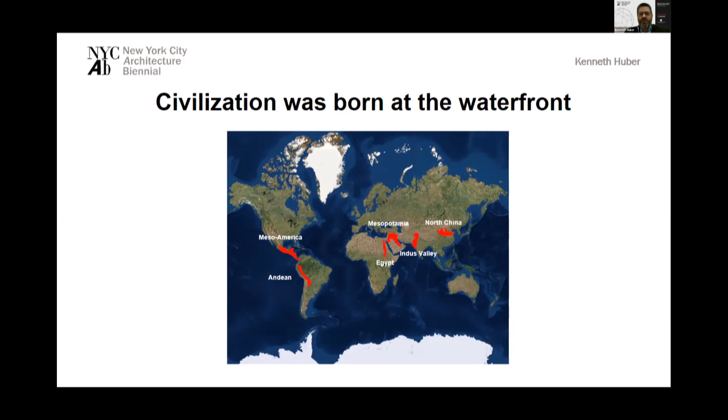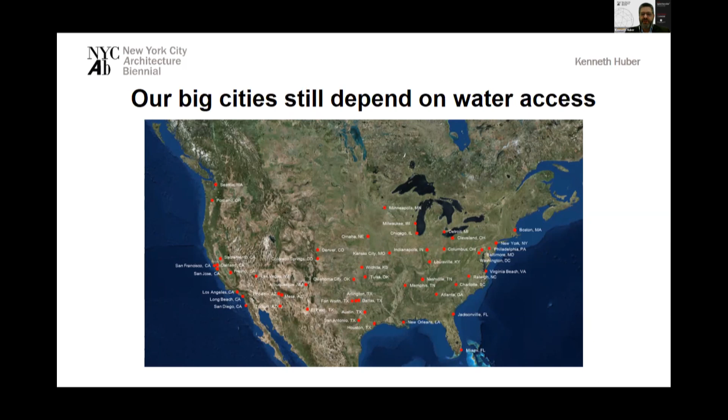Quite frankly, not much has changed, at least in the US. Our major cities are either on coastal bodies of water or inland bodies of water, whether that be lakes, streams, or rivers, because we still have that kind of dependency on the water for sustainability and success of that urban environment. I'm primarily focusing on urban waterfront redevelopment, but these same principles can apply beyond that.

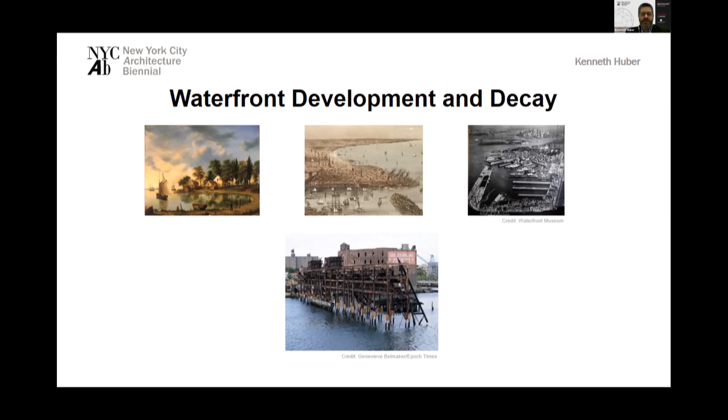But as shipping has moved away from the water, pun intended, into other forms of transportation, those properties have become dilapidated, decayed, contaminated from years of industrial use, cut off from the surrounding neighborhood, and really falling into the water, causing even more contamination. They've become an eyesore. Something needs to be done.

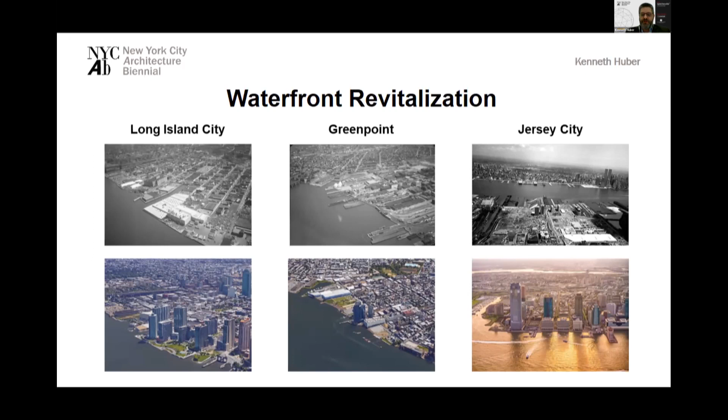What we found consistently, time and time again, with a few examples shown on screen, is that when we redevelop and revitalize a particular block at the water's edge, the neighborhoods around it begin to be revitalized as well. Investing in a small section of the waterfront can have a radical impact on the surrounding neighborhoods. I want to share with you a case history from Jersey City, specifically Paulus Hook.

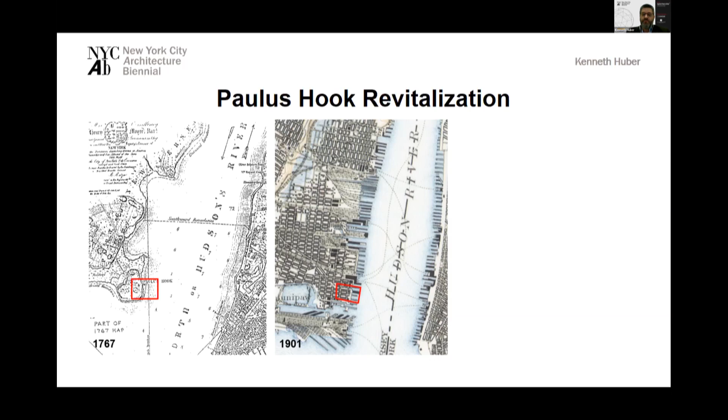Our particular site, again in the red box, was occupied at this time by the Colgate-Palmolive Company. They occupied 14 blocks in downtown Jersey City, and this was the center of their operations. From this point, their goods were sent around the entire world. You can also notice that they have 4 piers within their property, and you'll notice how that changes over time.

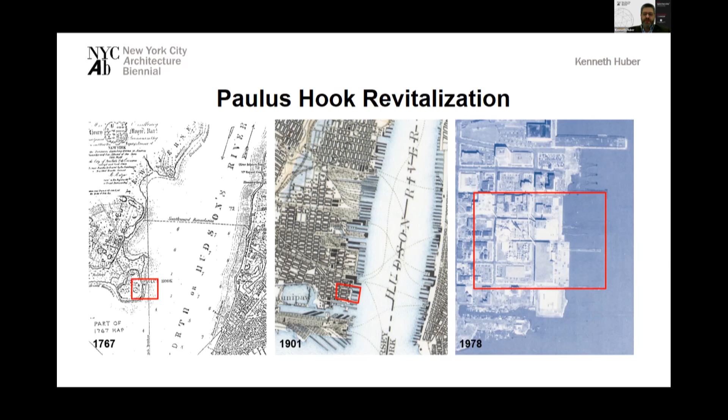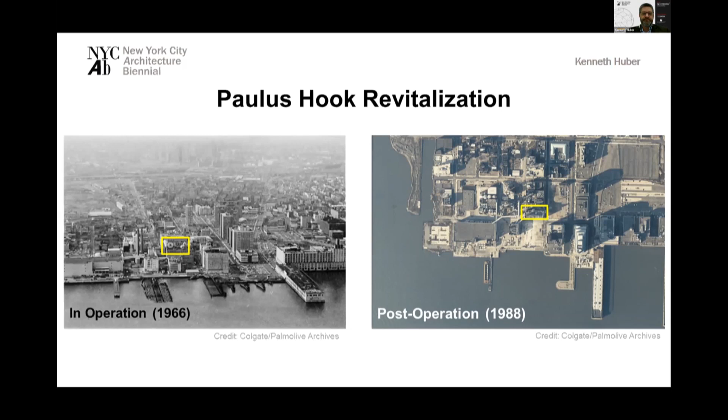So obviously something had to be done. This site's contaminated from years of industrial use, so that cleanup needed to take place. This bulkhead is not providing a reasonable cutoff to prevent cross-contamination of those contaminants. The site's also cut off from the surrounding neighborhood, literally by fences. The streets themselves are inaccessible to the public. And the infrastructure is so old and falling apart that it could not support future development.

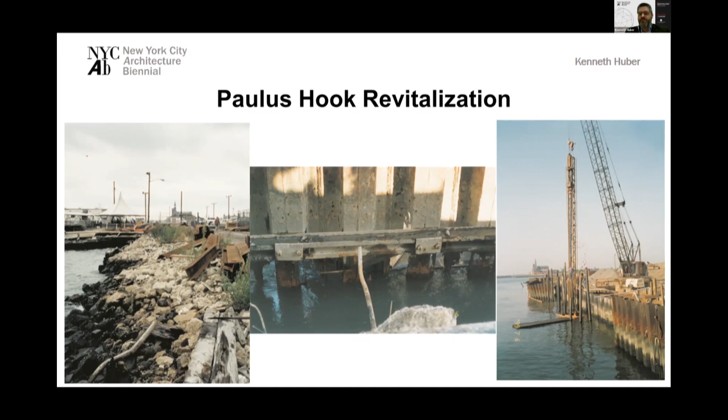So Colgate decided to invest in some infrastructure improvements to allow for future development to take place. I'm going to go through some of the key aspects of the improvements that they did.

First off, they replaced the existing bulkhead with a brand new bulkhead to protect the shoreline, prevent it from further eroding, and also allow excavation of contaminated hotspots upland of the bulkhead. You can see some of that excavation taking place there. That bulkhead also serves as an effective cutoff to prevent migration of contaminants into the body of water once it's finished.

Immediately behind the bulkhead, they installed a brand new 8x10 box culvert combined sewer outfall. This box culvert connected 3 combined sewer outfalls and redirected them to a screening chamber at the far south end of the site. Jersey City was working on the screening chamber, and Colgate worked with Jersey City to design this box culvert to connect to it.

So three combined sewer outfalls that dumped raw sewage during storm events were now taken out, redirected, and are run through a screening chamber before they discharge. That takes out a lot of the large particles and floatables that are in the water before anything gets discharged, and that's a significant improvement over what was there before. Now, mind you, we would love to see more done to improve combined sewer outfalls, but this was a huge step, cleaning up three combined sewer outfalls in one project.

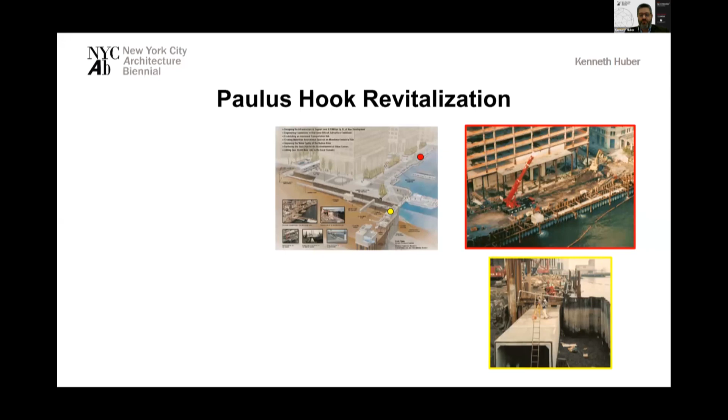Colgate also worked with NY Waterway to install a brand new ferry landing at the facility, and none existed before. It wasn't planned before, but when Colgate began to talk about the possibilities of future development, NY Waterway saw the potential and joined in the project, and we helped develop a ferry landing to go with this redevelopment project. That ferry landing is two blocks south of the Exchange Place PATH Station, so there's a subway nearby.

You can see a parking lot right behind the ferry landing, so there's parking where you can park and ride. Furthermore, just one block to the west of the shoreline is the New Jersey Transit light rail system. Again, no station was planned, but Colgate worked with New Jersey Transit to install a new station right at the site, and also worked with them to allow for infrastructure improvements, new utilities to be placed below the new light rail lines to support future development. So you've got an intermodal transportation hub within two blocks right here: park and ride, light rail, ferry system, and the PATH subway.

And they finished it off with a beautiful esplanade that's open to the public. On a nice day like today, you can go out there on lunch and really enjoy the views of Lower Manhattan. It's absolutely beautiful. And what amazes me is this was 4 blocks of shoreline, roughly 1,200 feet.

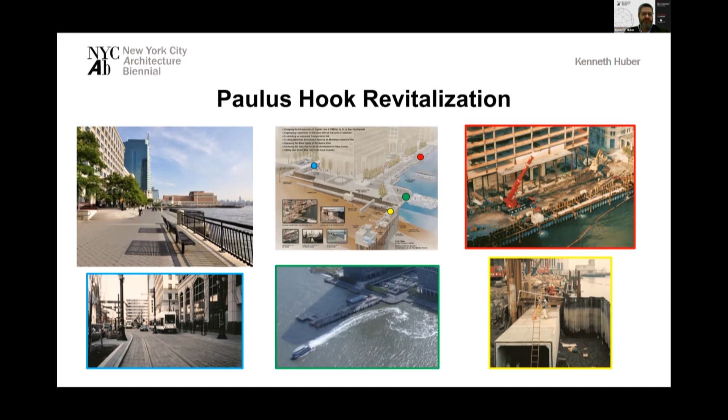But what's happened since is a complete revitalization of downtown Jersey City. Shorelines both to the south and the north have been improved for many blocks. And we've seen brand new development take place, not just on those 4 blocks adjacent to the waterfront, and not just all 14 blocks of Colgate-Palmolive, but throughout this neighborhood. It's had a huge impact on redefining Jersey City. And this is the sort of thing that makes waterfront improvements and sustainable waterfront development so exciting, because it can have such a radical impact on the neighborhoods along the waterfront.

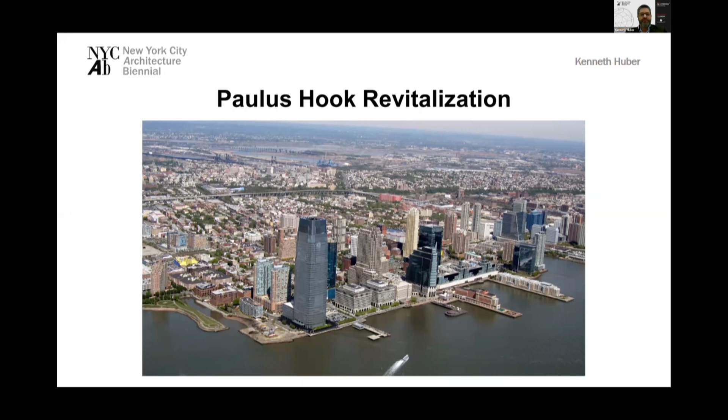And as designers, we need to respect that power, as we've seen in Ida up in New York City, as we saw in Superstorm Sandy back in 2012. Water has incredible destructive power, and as designers, we need to respect that and build that into our design plans. So let's take a look at what's so difficult about waterfront construction, waterfront design, waterfront development.

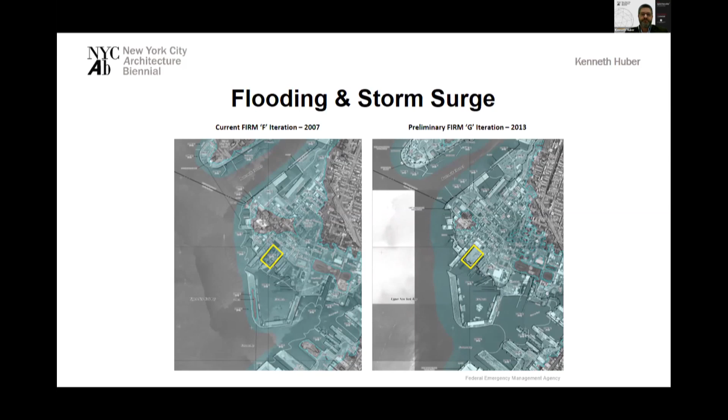This sets what's called our base flood elevation. So what level of inundation can we expect? Let's say from this map, it's roughly elevation 10. So that's our base flood. That's where water levels will rise during a storm. But again, that's just a snapshot.

And just as was talked about in the previous presentation, we need to consider things like climate change and sea level rise that results. Now, I want to be clear, sea level rise is not a new phenomenon. It's a known fact. It's been happening for hundreds of years and has been documented. The part that we are not so familiar with, what we are trying to predict, is the impact climate change can have on sea level rise.

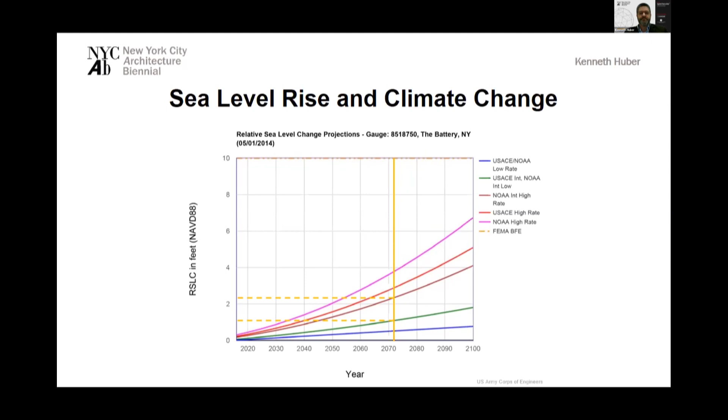So we have our base flood elevation from FEMA, but that's a snapshot in time, and our building needs to last for 50 years. So we need to see how much sea level rise we need to understand and design for. And then we need to put that all together.

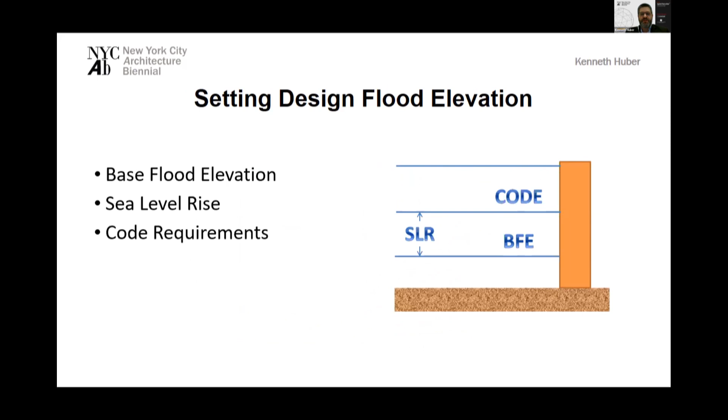So we start with our base flood elevation from the map. We add to it our sea level rise from the predictive models we just looked at. Then we add to that the code requirements for a particular freeboard. And those codes are changing, so you need to understand your local building code and apply the required freeboards. And that gives us what's called our design flood elevation.

Now, everything else that we talk about from this point forward is related to that design flood elevation. We can set that design flood elevation where we feel is appropriate based on that sea level rise. We can even provide a larger freeboard than code requires. And zoning code allows us to do that in most jurisdictions.

But we, as the design engineers, we as the design professionals, need to come to the table and make an assessment of where we think we want to design this particular project for. That's up to the design professional.

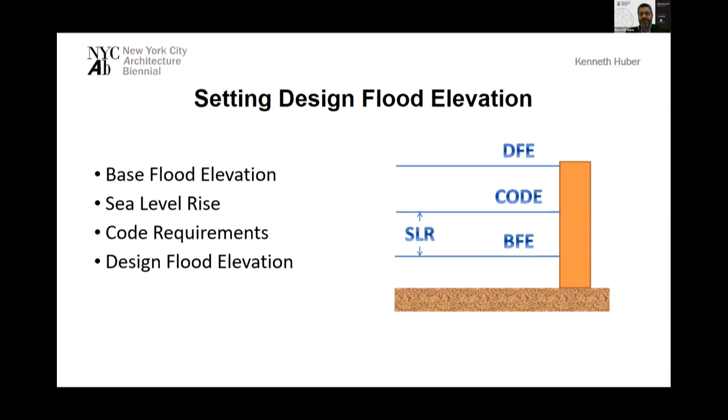So once we've set our design flood elevation, we have other things to consider. And this is where things continue to become difficult at the water's edge. The next thing to consider is loading.

So when water inundates a particular site, hydrostatic loads occur. Hydrostatic meaning it's water that's not moving, simply by being there. Loads are imposed on the side of the building because the water wants to push in. But loads are also applied underneath the slabs of the building.

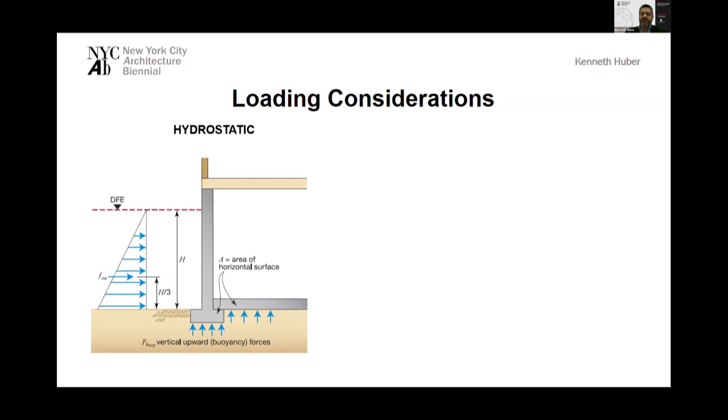So for example, if your building has a basement and that site gets flooded, that basement is well below grade. And the deeper you go in water, the more pressures push up on that slab. And we need to consider that because a slab, a basement slab, can fail under hydrostatic pressures. Even if nothing moves, even if the water stays still, that pressure can pop a slab and cause extensive damage inside.

We also need to consider that in flood, those waters are moving, and the movement of that water increases loads on a structure. It pushes against that structure, causes drag along the sides, and we even have crashing waves if the storm water is high enough.

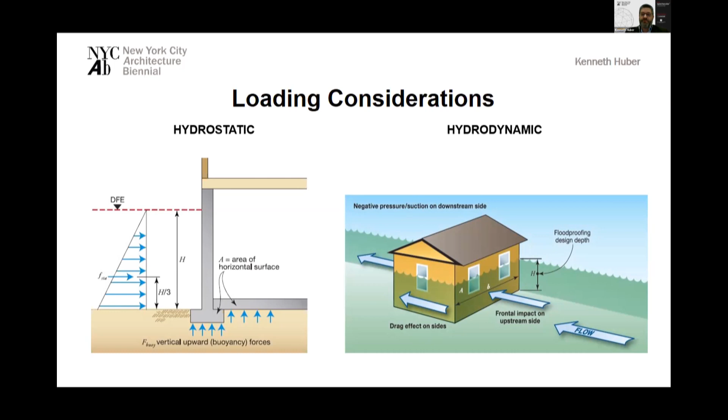Furthermore, we need to think about impact because there's floating debris in this water, this flood water, and we need to think about wave runup. So waves are crashing on the shoreline. The flood may not reach us, but maybe the wave runup does.

We need to think about those things, particularly when we're siting our building. Where are we going to put it? Can we put it back far enough that it's not going to be affected by a storm?

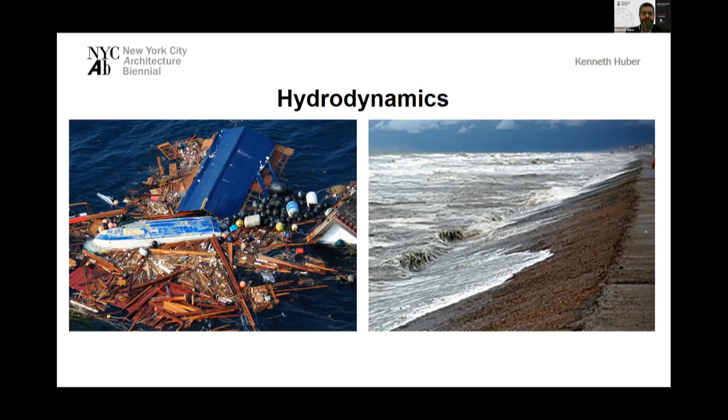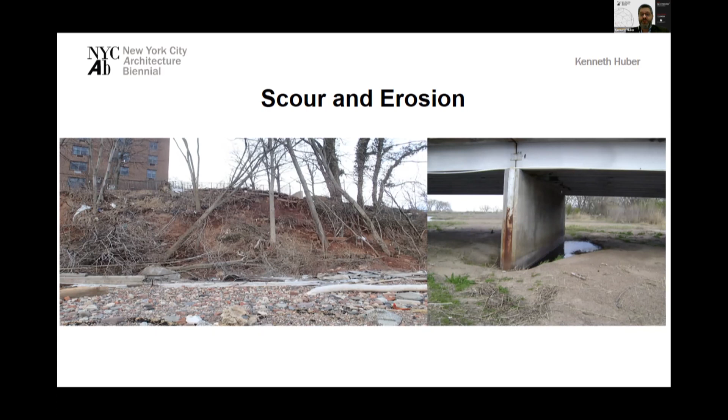So I want to talk a little bit about the waterfront elements that are useful in protecting our properties. We'll start with our shoreline protection systems, listed from least intrusive and most environmentally beneficial, to most intrusive and least environmentally beneficial. They'll also be on an increasing scale of robustness, going from relatively weak to incredibly strong shoreline protection systems.

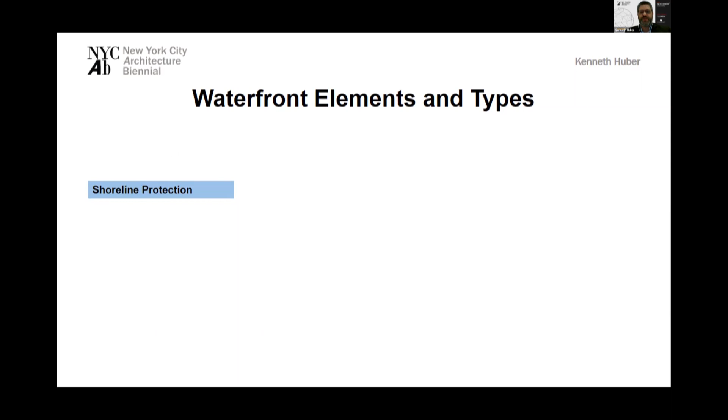First is a vegetated slope. Everyone likes to do this sort of thing because they're incredibly helpful to the environment. We're building new wetlands, and wetlands are an incredibly valuable resource for habitat. There are thousands of species of organisms that live and grow in these systems, and thousands more birds and animals that stop by for various periods of their life to feed or reproduce. These are incredibly important. However, they're not very strong, so they're reserved for areas of low flow, low energy, like protected coves.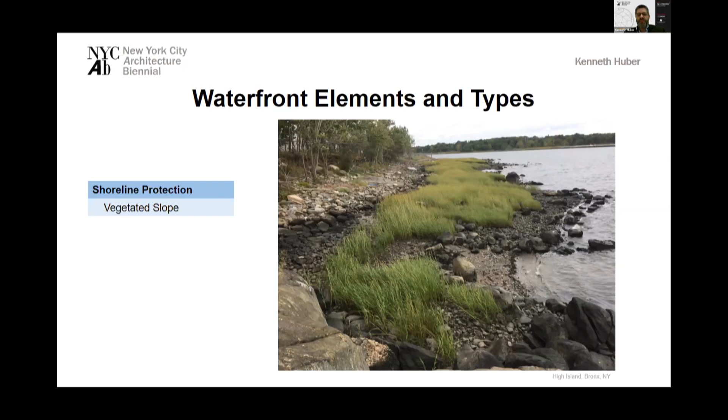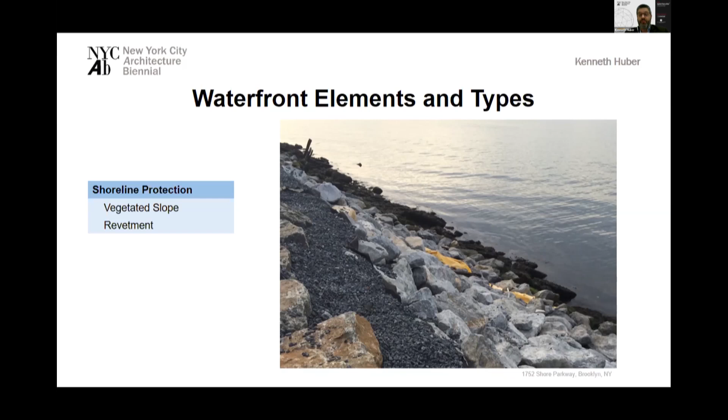Next is a revetment. A revetment consists of a slope and some form of armoring. In this picture from Shore Parkway, this is riprap or stone type armoring, but the armoring can also be concrete blocks, concrete jacks, mattresses, gabions, all sorts of things. Sometimes these revetments are also planted, so they can have greenery growing through the armoring. In this case it's just riprap, but the armoring creates nooks and crannies that organisms can live in or hide in, and it allows encrusting organisms to grow and thrive. So this is pretty good ecologically, and significantly more robust than a vegetated slope.

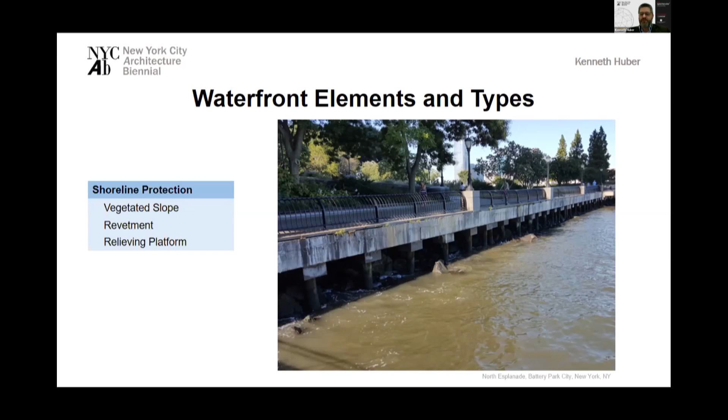The next is a relieving platform. This one is a high-level relieving platform - most are low-level, where you wouldn't see the structure because it's below water. This one you can see it. There are piles supporting a platform with soil on top, and a head wall at the front to hold back the soil. But water can get underneath that, so there's still some habitat protected. Now it's mostly for predators because it's shaded, so you can't get encrusting organisms, and those lower on the food chain generally don't want to go into those dark spaces. So this is limited in its habitat creation, but it does provide some, and it's very robust in its protective level.

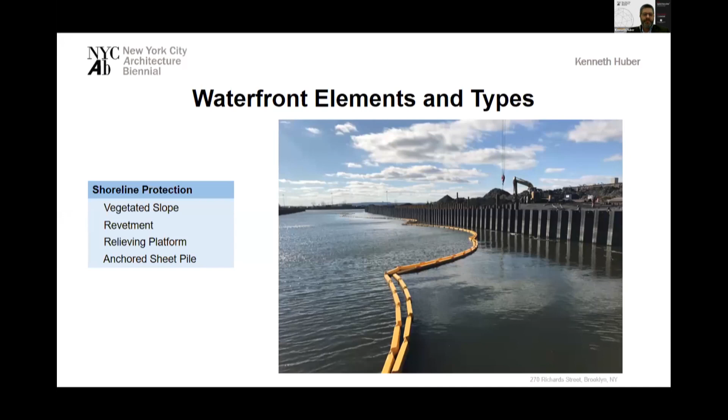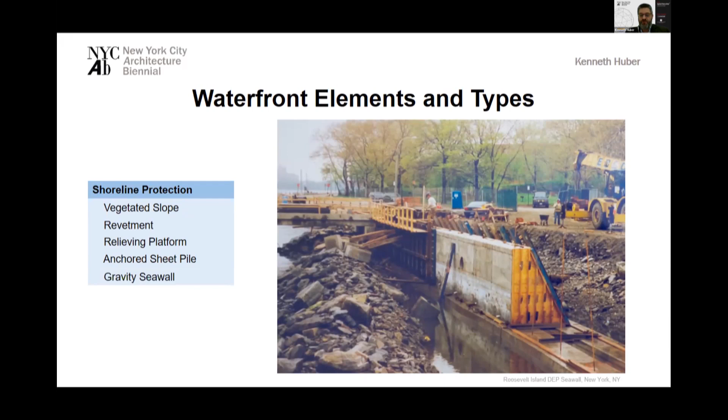And the next is a gravity seawall. As you see in the picture here, this one's from Roosevelt Island. You can see the amount of disturbance required to construct one of these. They are very disturbing of the environment, but they're also very robust and good for where you have high loads.

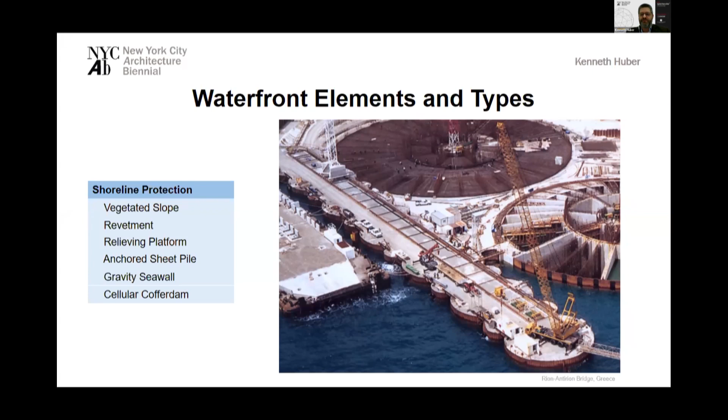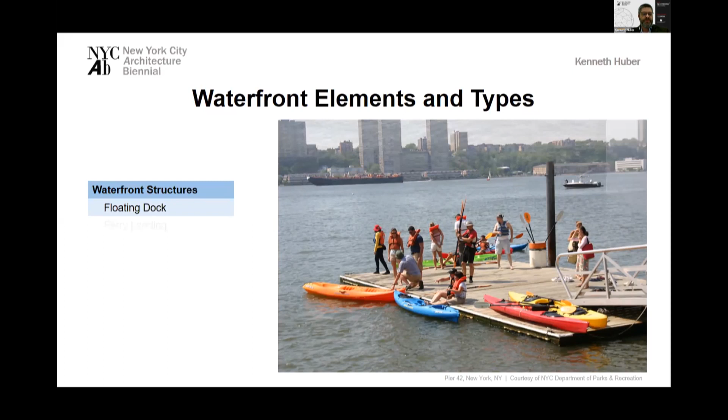Now let's talk a little bit about waterfront structures that may support our shorelines. First is a floating dock. These are often used as kayak launches or swim platforms, allowing people to get at the water and into the water for recreation. A little bit bigger floating dock is a ferry landing - similar idea, it allows people to get to the water and specifically to load onto ferries or other vessels for transportation.

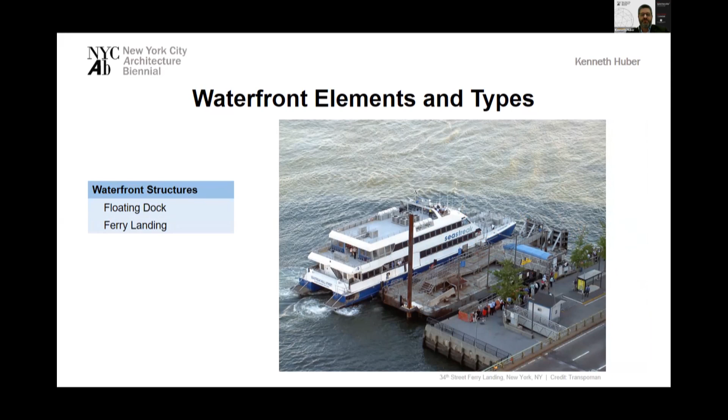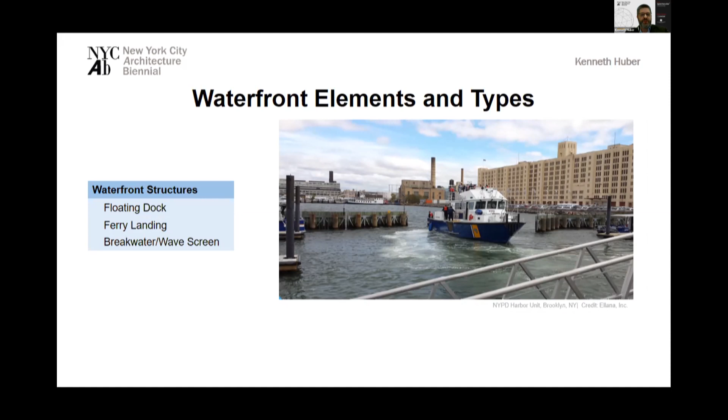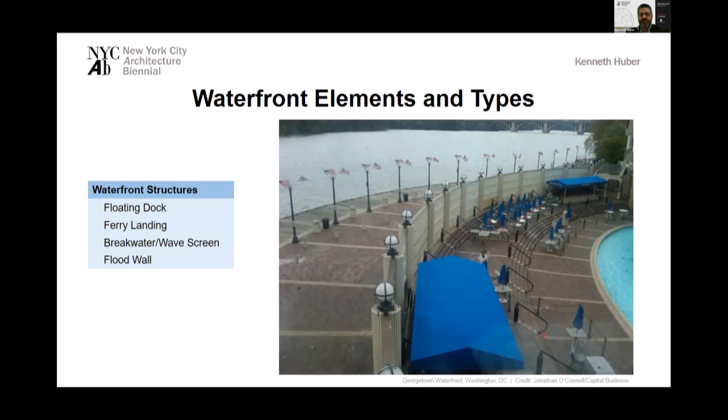Next is a flood wall, and you may not think of a flood wall as a waterfront structure, but quite frankly, in a flood, that's your waterfront. So those are waterfront structures.

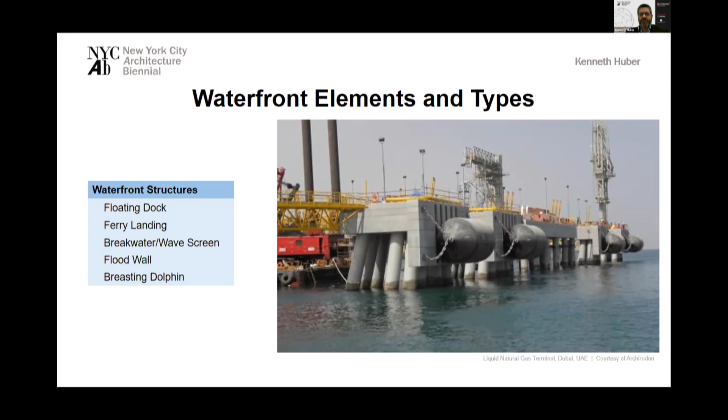Next is a breasting dolphin. Breasting dolphins are used for shipping exclusively. They're a little less intrusive than piers or wharves, which we'll look at in a second. They allow ships to come up alongside groups of piles, connected by small catwalks, so they don't occupy as much space as a pier or wharf, but still allow for the transportation of goods from ship to land. Generally we're looking at liquid or powder type products for distribution in this type of system.

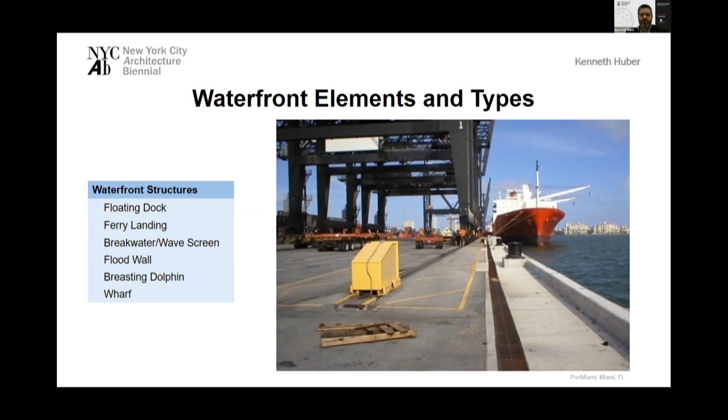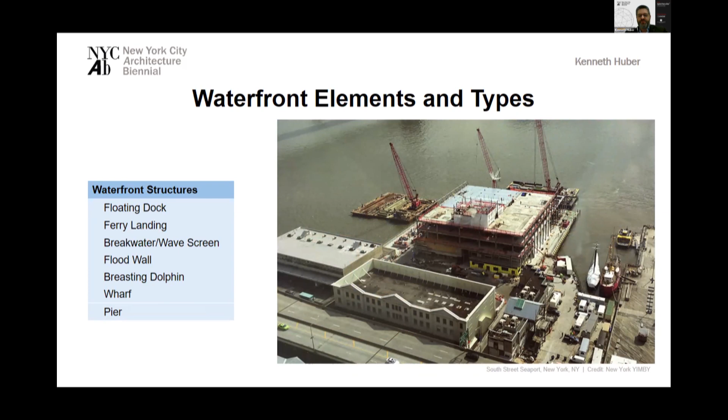And then just a brief review of our water-dependent uses. These are uses that have to be at the shoreline. They can't be elsewhere, they can't be relocated.

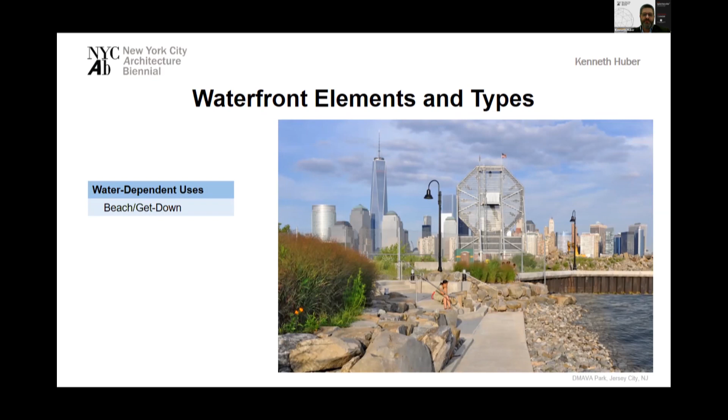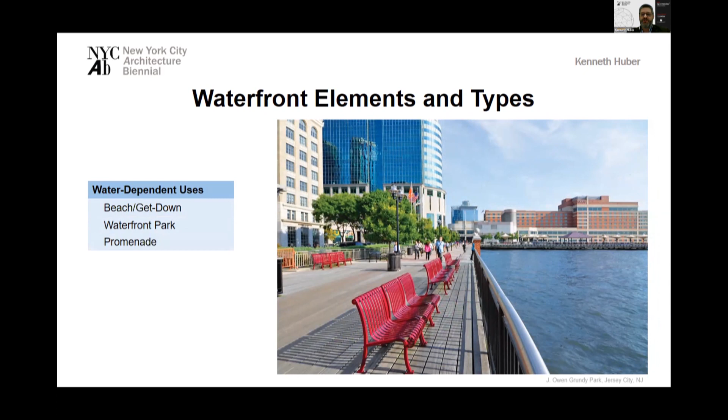Then we've got a waterfront park. Many of our piers and wharves are being turned into parks at this point. We have a promenade or esplanade, this one at J. Owen Grundy Park, which is in Jersey City, just north of the Colgate-Palmolive development we looked at before.

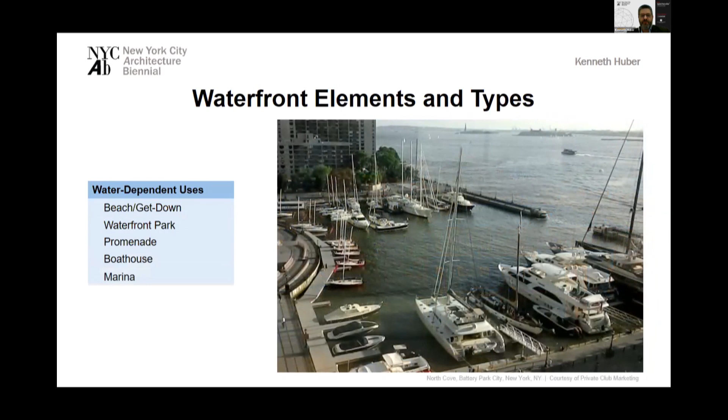And then we have boathouses, marinas—this particular one at Battery Park City, where we store our vessels—and then ports and terminals, which are exclusively for shipping and industrial purposes.

So those are the tools in our toolbox, but that's not the only consideration we need to think about. In fact, our last speaker spoke about materiality, and that's what we need to consider now: durability of the materials that we use at the shoreline.

So we may think, well, let's use timber. That's a natural material—it's green in that it can be grown and regrown as we need it. And that's certainly true, but timber has a poor record of durability at the water's edge. Now, timber used to last a long time. It was used almost exclusively in the 40s, 50s, and 60s.

But then our harbors were far dirtier than they are now. And as our harbors get cleaner and cleaner, we see that the deterioration of timber increases, becomes more rapid. There's a reason for that: the organisms that cause that type of deterioration are coming back. We'll talk about that in just a moment.

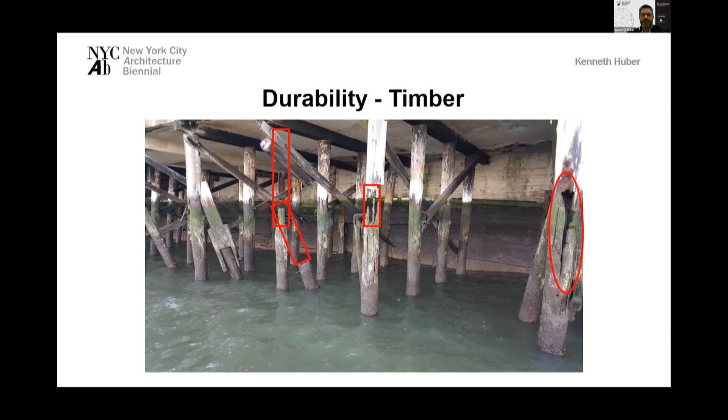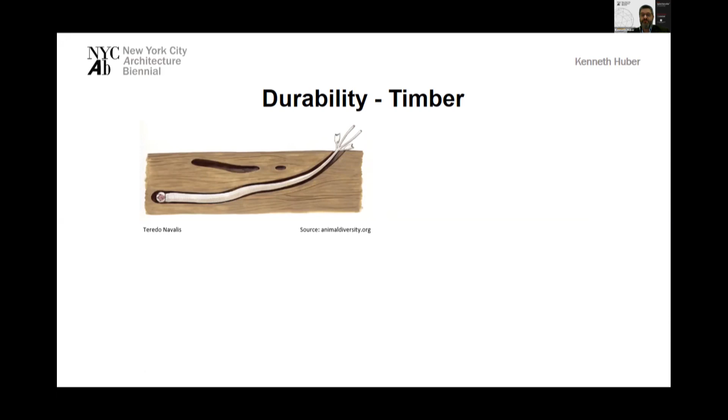So what causes these kinds of deterioration? First up, we have the teredo, or shipworm, which creates burrows in the wood. That burrow becomes its home, and it will stick its tentacles out from that hole to eat—it's a filter feeder, but it causes these holes. On the outside it may look fine, but on the inside it creates Swiss cheese, all these burrows throughout the wood, and this is what can hollow out the inside of a piece of wood.

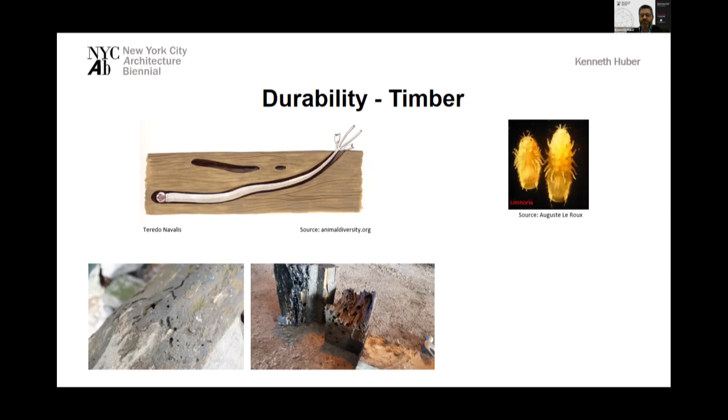The second organism we need to understand is limnoria. Limnoria doesn't create burrows—it actually eats wood, from the outside in, and when we get this hourglassing type of look, that's caused by limnoria. These two organisms are on the rise in New York Harbor because we're doing a good job cleaning up our harbors at this point, so timber becomes less and less desirable in the harbor as the harbor gets cleaned up.

Now, there are things we can do to protect it, like inject chemicals into the timber, but that comes with its own problems. So let's look at other materials.

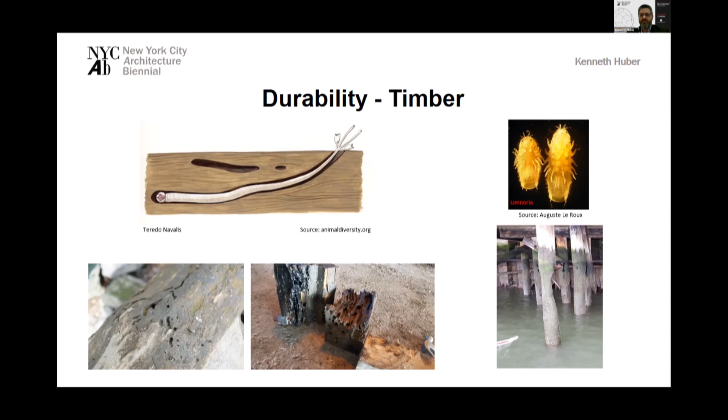Perhaps maybe we'll look at steel. You may think steel would do a great job, but steel, as you probably know, is subject to corrosion, and the saltwater environment in our coastal shorelines is extremely aggressive in corroding steel. And even our inland bodies of water, the constant wetting and drying is also extremely aggressive.

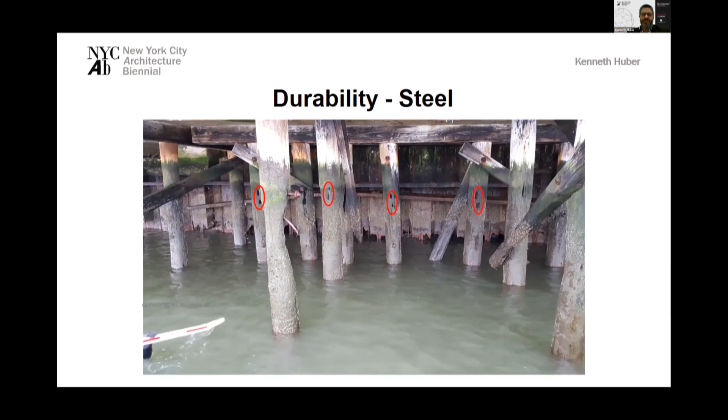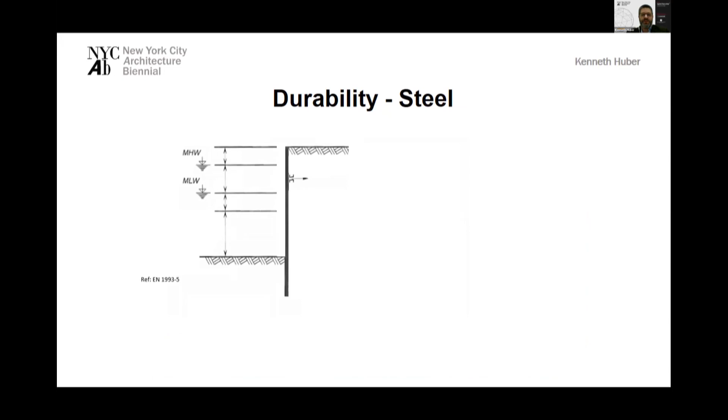There are things we can do to protect that steel, like put in coatings or provide cathodic protection. But in order to do that, we need to understand how steel reacts in water. In a tidal body, coastal waterfronts, we have several zones we need to be aware of: the splash zone above mean high water, the intertidal zone between mean high and mean low tides, low water just below mean low water, the part that's always immersed, and the part that's buried in the ground.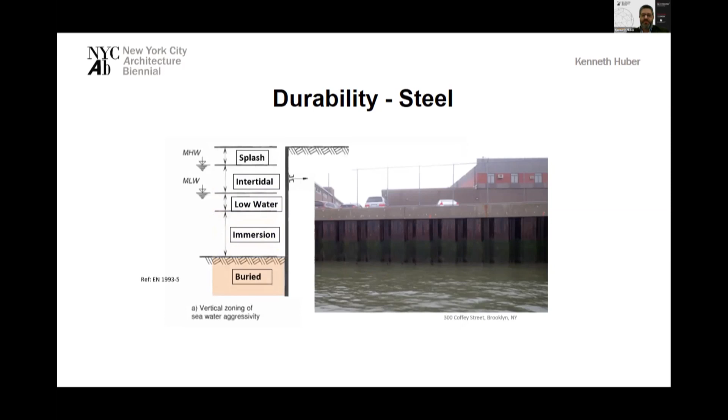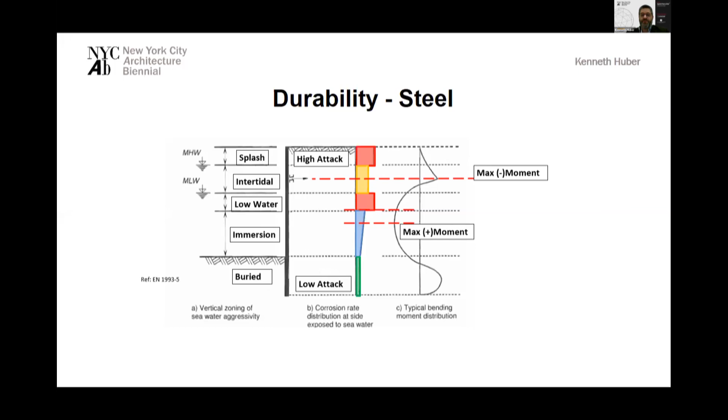Now let's take a look at corrosion rates. Corrosion rates are highest in the splash zone and low water zones. Hence, the corrosion that we saw at the low water zone in one of the previous pictures. We get moderate rates of corrosion in the intertidal zone, and then things drop off in the immersion zone and the buried zone. We need to compare that with where our maximum moments are, where this sheet wants to bend. Those occur at the tie rod and generally somewhere in the immersion zone, not where our highest rate of corrosion is. So we can accommodate that, we can think through where we're going to get corrosion and what kind of maximum moments we're going to get there. But we do need to think this through, or we need to protect for it.

So you might think, well, maybe steel's not the best material. Let's consider concrete. But concrete doesn't perform much better. It has its own problems. As salt water begins to penetrate into the concrete, the reinforcing can corrode and pop off that concrete, and it can do extensive damage. So we need to be careful even in specifying concrete, in understanding the kinds of concrete appropriate to use in the marine environment, how to use reinforcing steel in the marine environment, and also provide sufficient cover to protect it.

So you may think, well, none of these materials work. And that's true. That's the difficulty of waterfront improvements and doing waterfront sustainably. We need to select materials and protect those materials, but we also need to think about maintenance. In the coastal waterfront environment in particular, inspecting and doing regular maintenance on those structures is absolutely crucial to their long-term success, and not having to replace those structures shorter than we should. So keep that in mind. Materiality of what we do at the water's edge is extremely important, but so is regular maintenance, and that needs to be communicated to our clients. As the design professionals, that falls on us to communicate that.

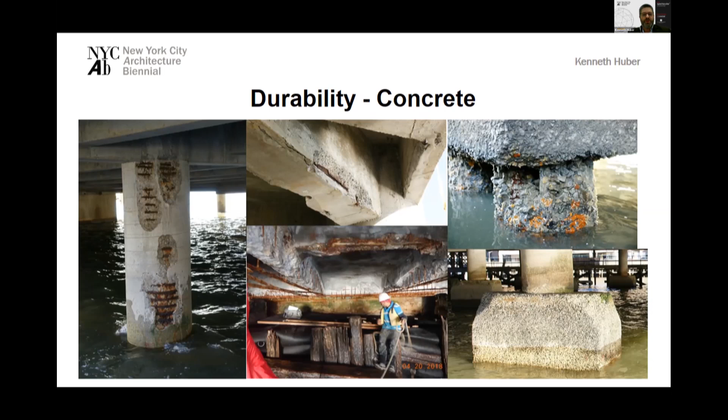I want to end talking about one of the last obstacles on waterfront construction, and that's permitting. Permitting can be an absolute nightmare. It can be very challenging to work through all of the agencies required to provide approvals before waterfront development can move forward. The first level, pretty much anywhere in the world, is a federal level that's generally required for approvals. Here in the US, that's generally the Army Corps of Engineers. They're going to usher that through the federal agencies and get that reviewed at the federal level. So we submit to the US Army Corps of Engineers, they review it, and they coordinate with other federal agencies to get a permit issued.

Except if you're in a Superfund site. So if you're in one of the nastiest water bodies in the world, like the Gowanus Canal, the Environmental Protection Agency of the US is the agency that governs that. They will oversee that, and they will waive all other permits. They are the final arbiter of what will be approved.

So unless you're in a Superfund site that's being cleaned up, you're going to have to go through all three levels of permitting. The second level is the state level, and I generally practice in New York State, so what's listed here are the New York State agencies. The lead agency is the Department of Environmental Conservation. They're the ones that are going to issue the overall permit, but we also need to talk with Department of State for a coastal consistency review, and we need to talk to the Office of General Services to determine if there are lands owned by the state underwater that also need permissions.

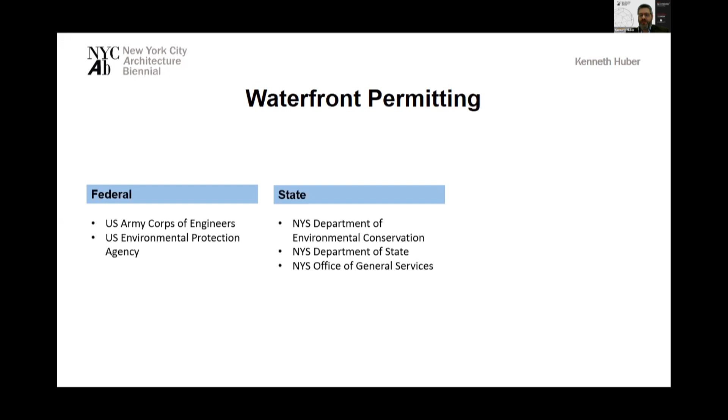Now, these two are generally submitted at roughly the 30 to 50% design stage, so maybe schematics or 50% DDs. That's when shoreline design gets submitted for permits to both federal and state levels. They occur concurrently, and the permitting process can coincide with the design process.

But then at the local level, this occurs - normally it would be your local building department - and this occurs at the end of design. In New York City, the reviewing agency is Department of Small Business Services, and in addition to that, Department of City Planning also reviews development at the water's edge. In other jurisdictions, that can be the local building department. But it's important to know these zones where waterfront permitting is necessary, and they may not agree with each other.

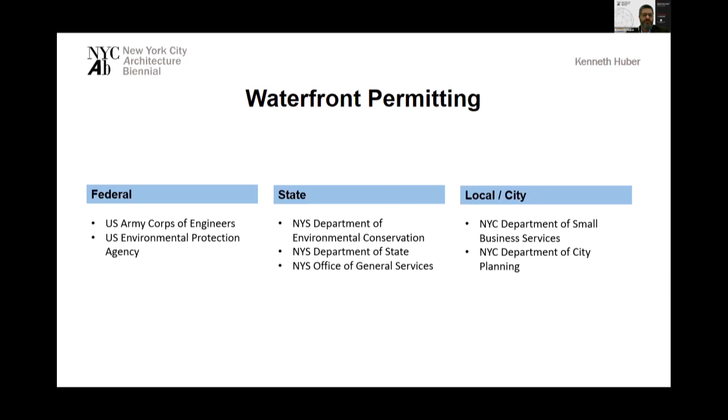So coordinating between this is a significant effort, and it's important to understand the impact on the schedule. And then it's also important to know when a permit is needed.

So moving from right to left, there's a portion of the site that's always underwater that requires a permit. Then there's the tidal wetland, which goes all the way up to the mean high water line for the state level in most states, and up to the spring high water line at the federal level, at least here in the US. It can extend if there's vegetated wetlands - it can extend up to the back of any vegetated wetlands. That's the tidal wetlands area.

And then beyond that, there's usually a buffer, and that buffer is assigned generally by the state. That buffer size varies by state and locality. Now in New York City, it's 150 feet and it's called an adjacent area. Anything in those three zones - the always wet, the tidal wetlands, or the adjacent area - those are going to require permits. So it's important to understand that and to budget your schedule accordingly.

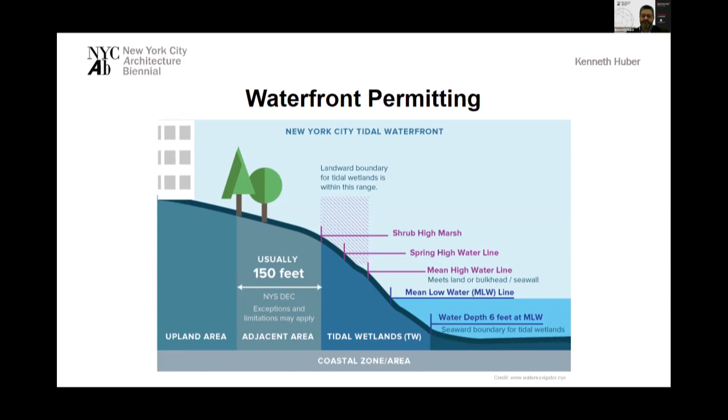I wish I could go into so many other things, but we are out of time. So I'm going to conclude my presentation here and just remind you, the reason that we do waterfront is because it has such an incredible impact on our neighborhoods and environment. And we need to respect its power and design accordingly.

Ken, I want to thank you. That was a great talk because, among other things, it gave those who aren't in the engineering profession insight into the toolkit - the tools, as you described them - that allow for everything from greater habitat to resistance, resilience, even permanence in some instances. It was fascinating to see some of the images from Jersey City, and how that transformation has had both community development and economic development benefits - issues that certainly relate to our theme of connectivity. And you touched on other places you've worked with Langan, at Gowanus Canal, the projects there. There are many others you might have mentioned that would have been just as fascinating.

There was one image of Roosevelt Island. I know you guys were working on the FDR Four Freedoms Park. But I have a question that relates to those - I'll call them architectural or urban design images rather than the engineering details - which has to do with, call it accessibility. I think the big transformation in the New York waterfront - I was working at City Planning in '76 as an intern on coastal zone management. I've worked on tugboats, lived on houseboats in New York Harbor, and the transformation is phenomenal, all in the direction of greater public accessibility, greater amenity, from the promenades and esplanades that you've worked on and described, to cultural facilities, more housing certainly, and certainly more parks. Balancing that greater public access with enhanced risk attendant to storm surge, sea level rise, extreme weather, climate chaos.